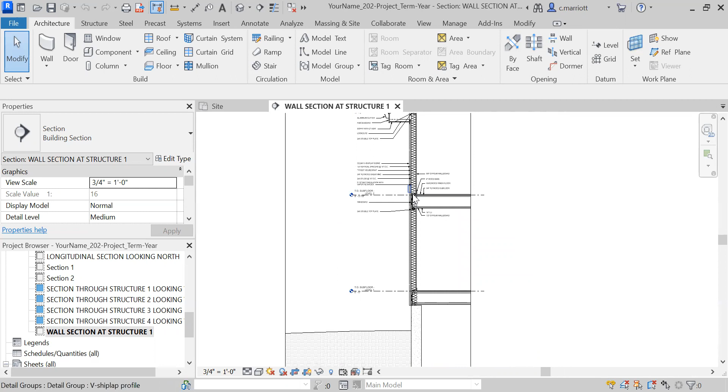In this video, we're going to continue working on the wall section. We have added some notes about the wall assembly and the floor above. At this point, we'll begin working on this floor and the foundation wall.

Before we do much more work to the foundation wall, we're going to make a change to this wall type. It's currently a 12-inch concrete wall. I'm going to click on edit type here, and we're going to add some things to this structure.

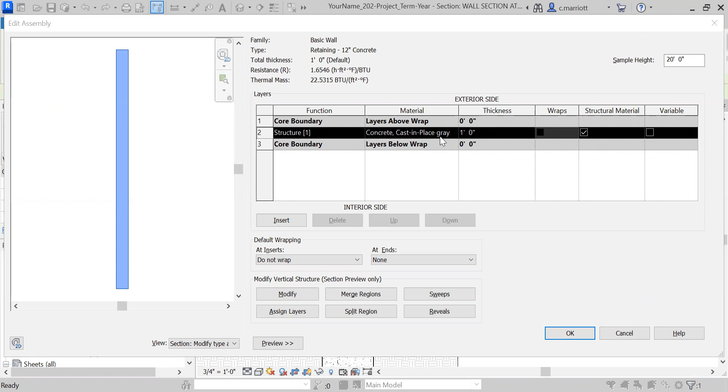At the moment, all there is in this wall assembly is a foot thick concrete wall. We're going to insert some more layers. I'm going to move this down and add 3 layers.

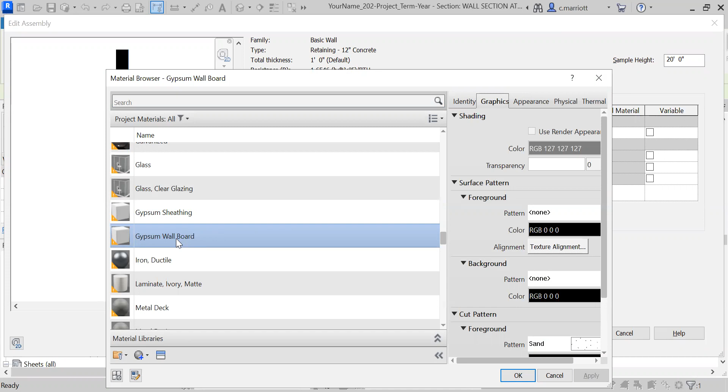The bottom one is going to be a finish layer. What we're adding is a 2x4 wall on the interior side of that foundation wall, and we'll be adding some insulation. So imagine this is a finished basement—that's the purpose of what we're doing here. Okay, wood, for this part.

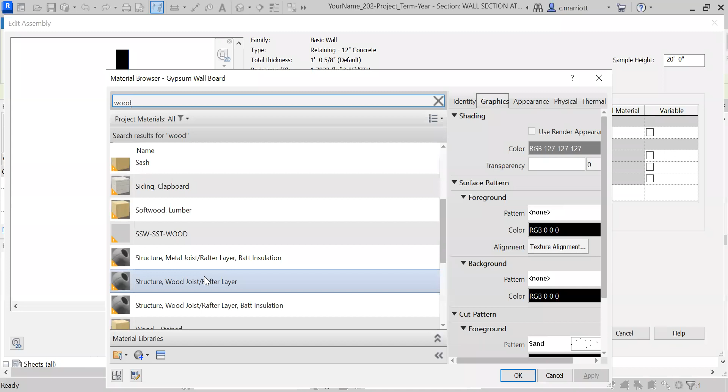Let me check and see what that should be called. I'm going to temporarily say okay here. Oops, we'll need to make some changes.

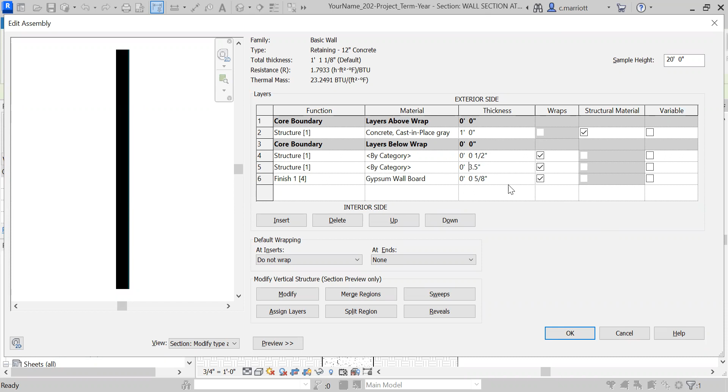So what we're going to have here is a 1/2 inch gap between the foundation wall and a stud wall layer. I'm going to change these thicknesses right now—3.5 inches, this will again be a 2x4. Let's see if it accepts that for the time being.

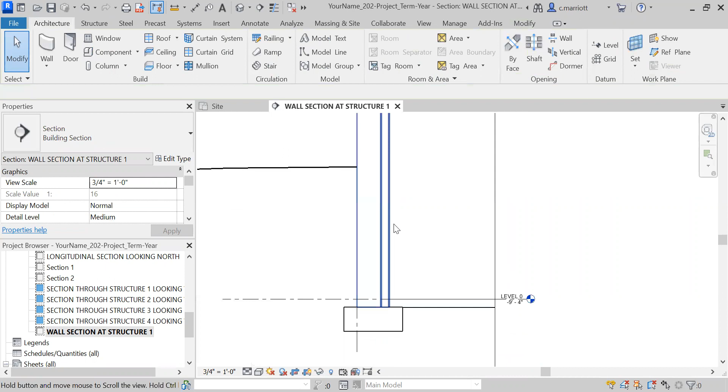Okay, so yes, now we have a layer of drywall. We have a space that we can put a 2x4 stud wall in, and then we have a little gap between it.

Now you can see that when I added this additional thickness to the wall, it sort of cut the slab back, and what we want to do is revise that so it comes back over to meet the foundation wall. So I am going to edit the boundary of that, and to do that I'll go to level 0.

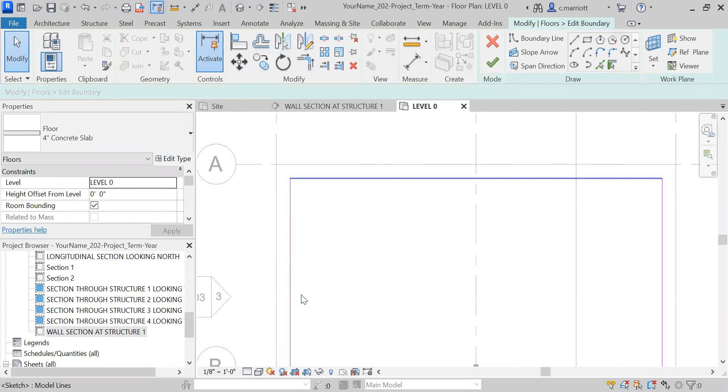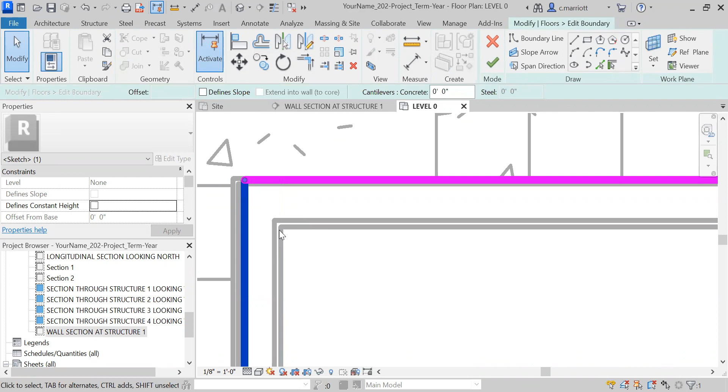Okay, I'm going to change my detail level to fine so I can see a little bit more information here. And I'm going to start to move my slab. I'm using the arrow keys to make these adjustments, and we'll take a look at it in the detail and see if it is where it needs to be.

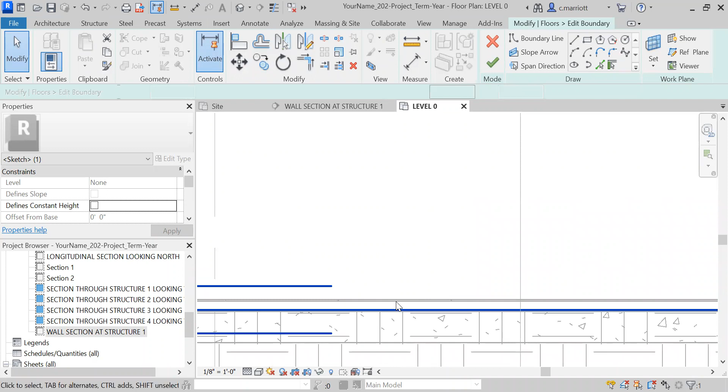Okay, I'm going to hit the check mark and let's go back to the wall section. All right, so I probably could use the alignment tool to get it a little bit closer to where it needs to be here. So let's try that one more time.

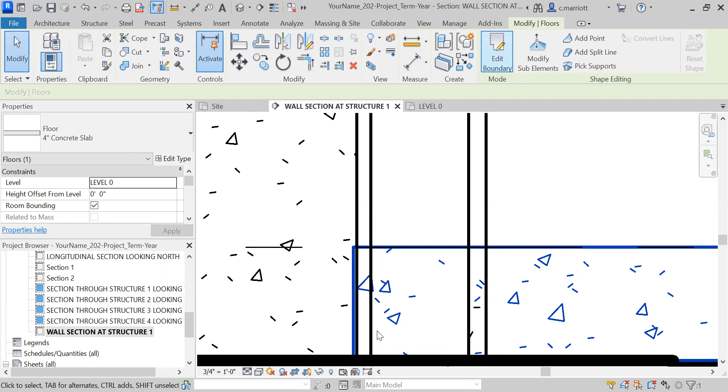Before I do that, this here is the south wall. So I want to pay particular attention to the relationship of the slab to the south wall. It's this one right here.

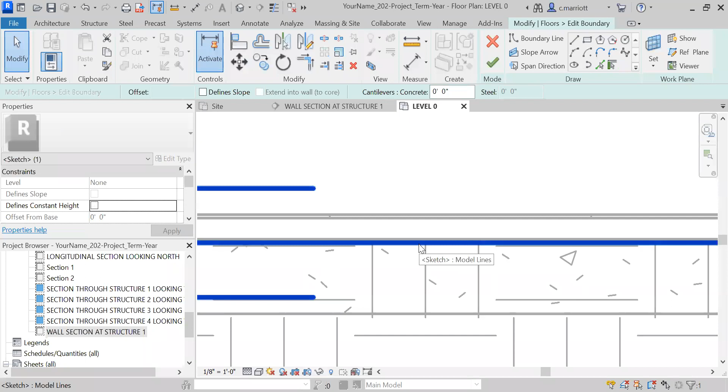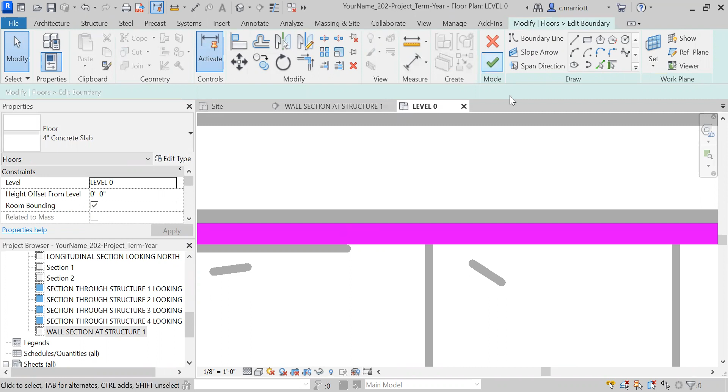See if I can click on it. I don't know that I can use the align tool in this case. Does not seem to be the case.

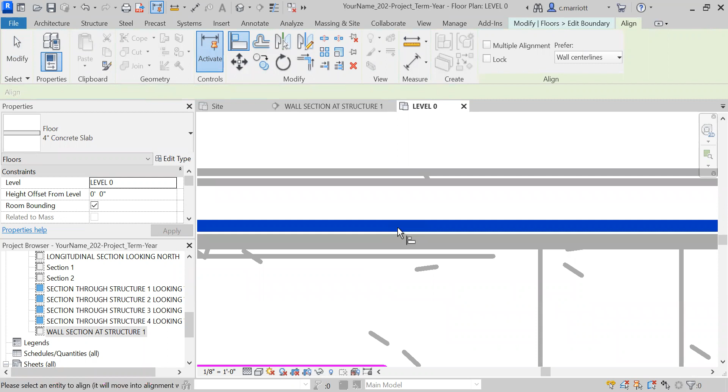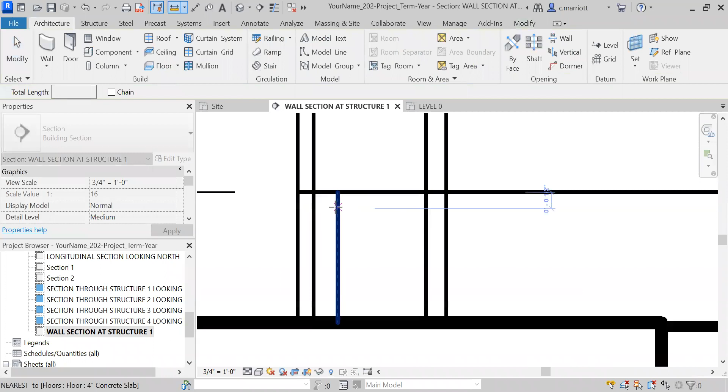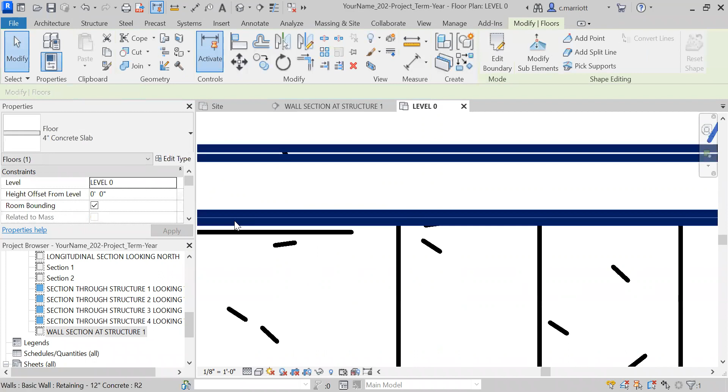I think what I'm going to do—I'm back in the wall section—is just measure this 1 1/4, and edit the boundary. Go back to level 0, and then I'm going to try to move it that specific dimension, and hit the check mark. Go back to the wall section, and I think we're in better shape now.

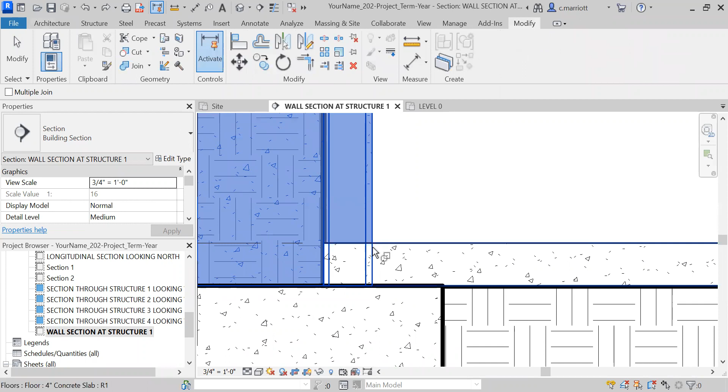All right, back in the wall section, I am going to click on one of these, and I'm going to go to modify, and I'm going to try to join the two. There we go. What we want is for this stud wall to sit on top of the slab. And for some reason, my foundation has shifted here.

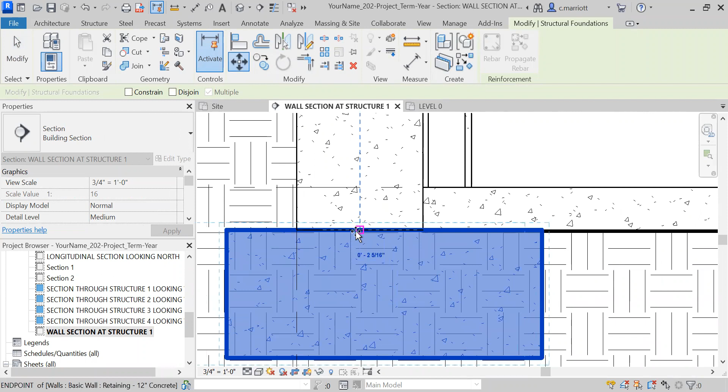We need to move that back so that it centers on the foundation wall. I think that may have shifted when I added the additional wall assembly here. So we're going to need to make that adjustment.

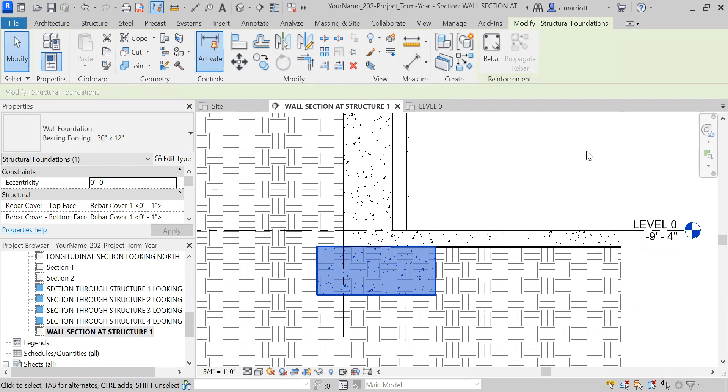So how do you reset it so it centers on the foundation wall? I've measured here the midpoint to the midpoint, 2 5/16 of an inch. And the setting that controls this is called eccentricity. So I've selected the footing, and I'm going to put in here 2 5/16 of an inch and apply that.

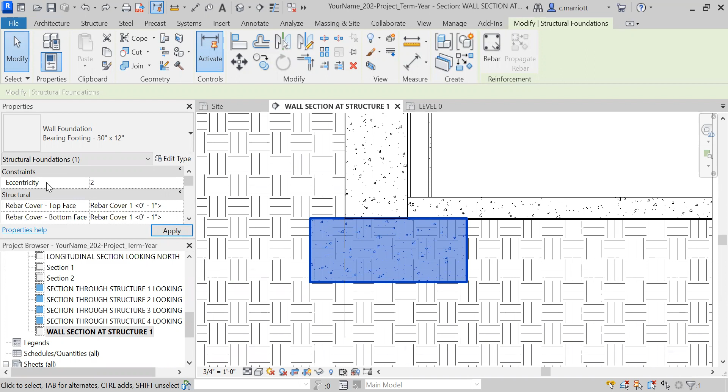Oops, what happened there? 2 5/16 and apply. There we go. So now you can see it's recentered itself on the wall.

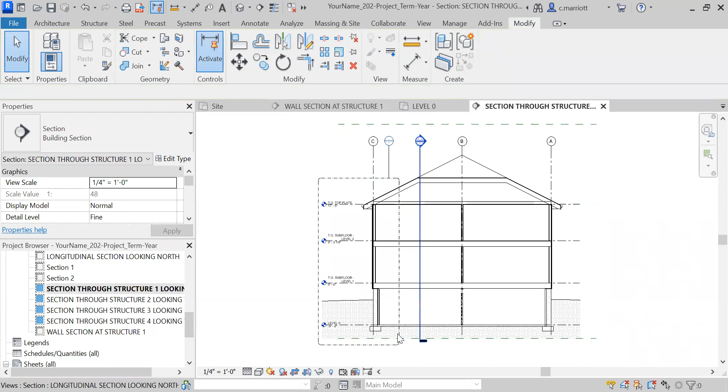Now, of course, this needs to be changed in all of the walls that are affected. So I'm going to go to section, this is section number 1. This one has been repaired, but this one probably still needs to be, and I'll have to go to the other section too. So 2 5/16 of an inch. And there we go, in section 1, or the longitudinal section, either one.

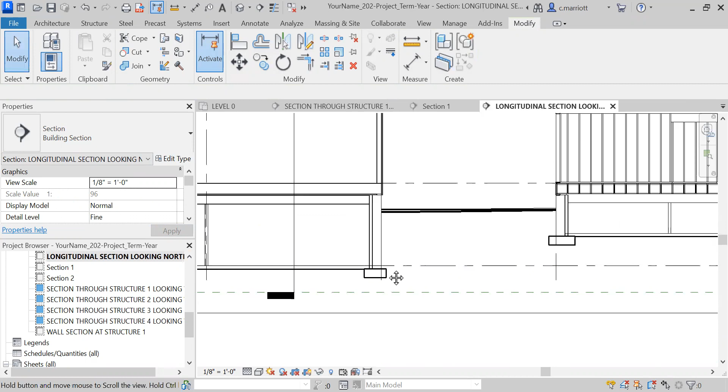I'm going to shift this over. So, I mean, there are instances where you may want to offset a footing below a foundation wall, and that is the reason for this particular setting.

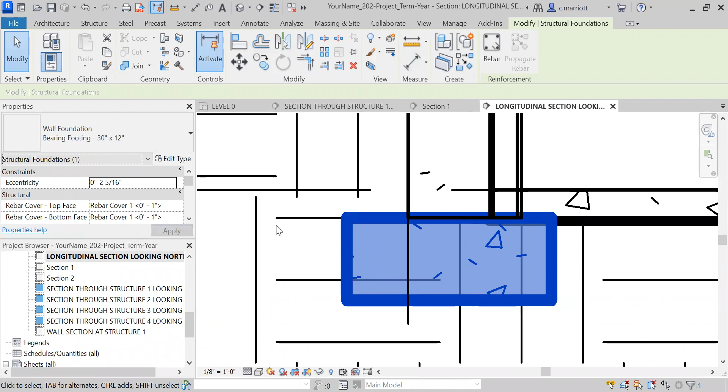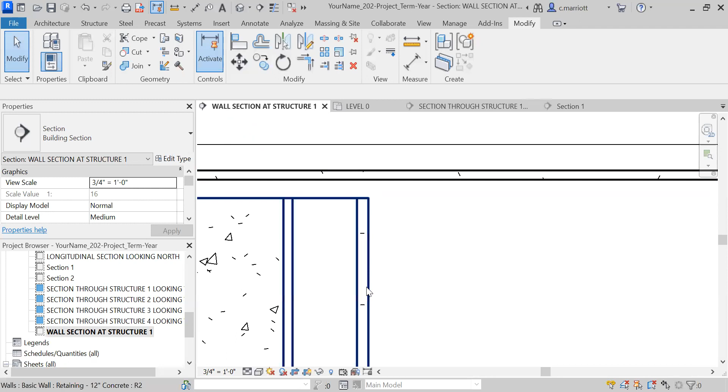Okay, going back to the wall section, everything is sort of coming together. We have a few revisions that we're going to need to make. This is the drywall of the floor above, or the gypsum wallboard of the floor above, and we wouldn't have this gap. What would happen is this would go up and join in here.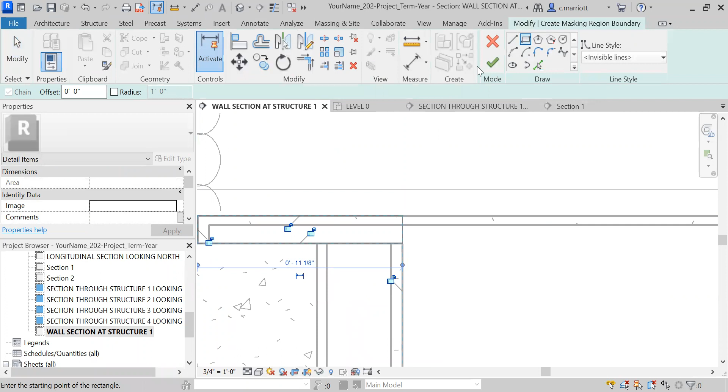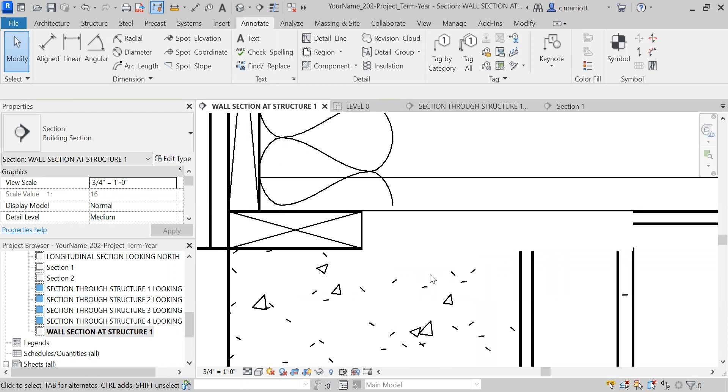So we're going to need to do some repairs graphically there. To begin this, I am going to go to the annotate ribbon, and create a masking region, and draw a rectangle that covers some of that. I've got invisible lines here, and now I'll need to replace some of the things that I've erased, but this is a starting point for this work. I'm going to pull this masking region down just a little bit. Now I will have to replace some of the line work that's in here, but that's okay.

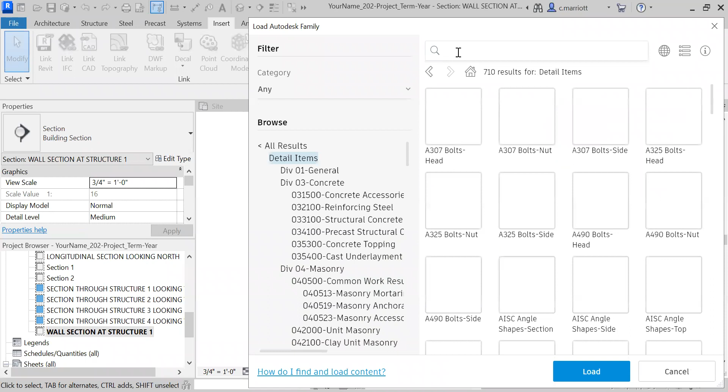I need a 2x4, and the way to bring that in, as you have done in the past, is to go to Load Autodesk Family, and we're going to type in lumber, nominal cut lumber section is what I want to load. And this is going to be our standard 2x4.

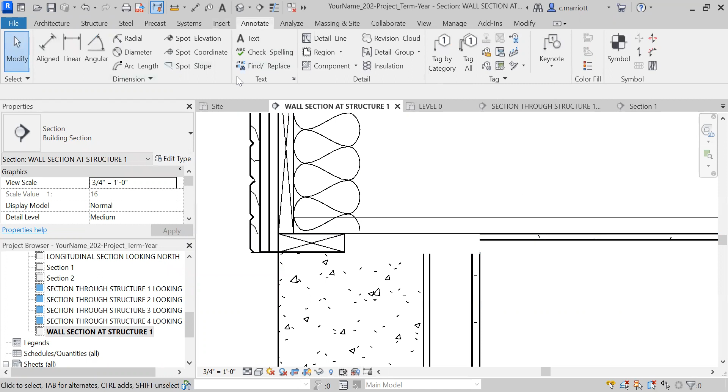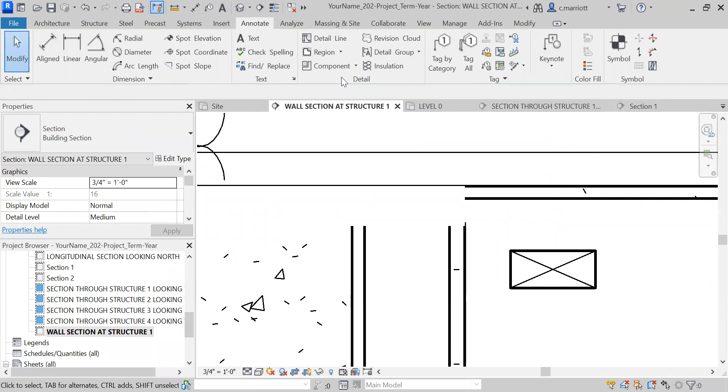Okay, so now when I go to annotate and bring in a component, I can look for a 2x4. There it is. Click here. I'm going to click on this, and rotate this member, and move it into place. So it's going to go right here. Should align with my drywall, or my gypsum wallboard.

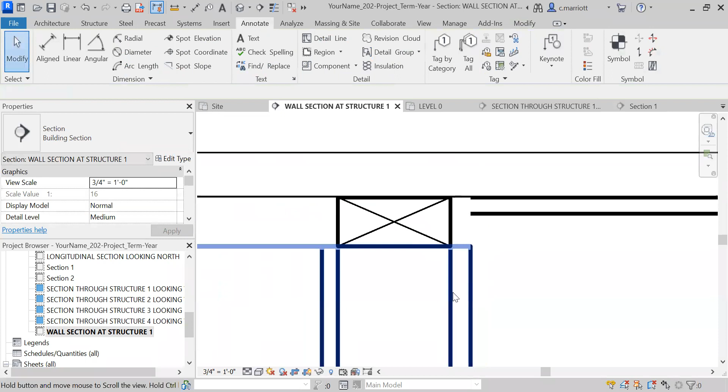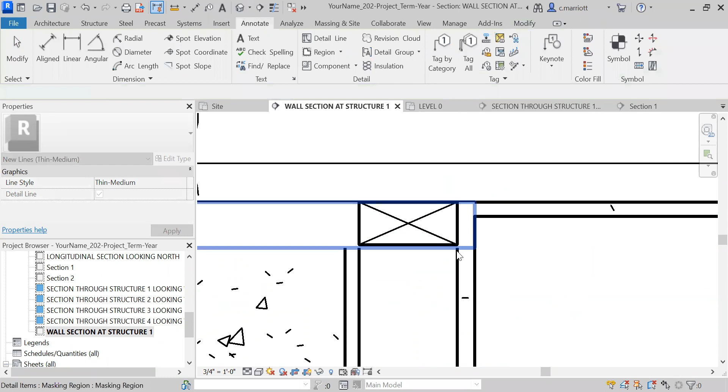So I'll have to add a few extra lines in here to kind of complete the picture. Going to annotate, detail line. I will use my thin medium line weight, and connect some of these lines so they're graphically making sense.

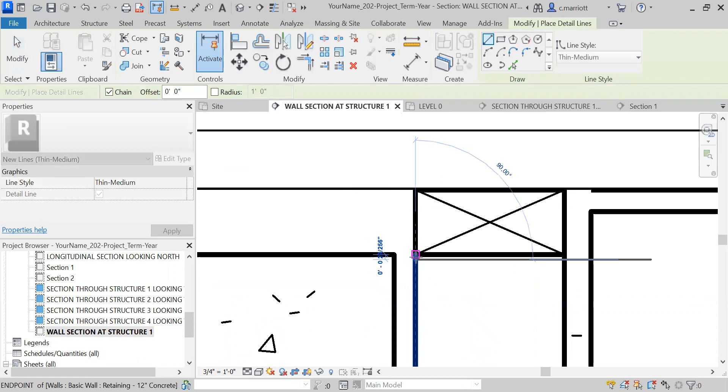The foundation wall should come over here. This is, as I mentioned, a gap that we're going to have. You wouldn't want to put the stud wall directly on the foundation. And I'm going to need to make a copy of that 2x4 down at the bottom of the wall.

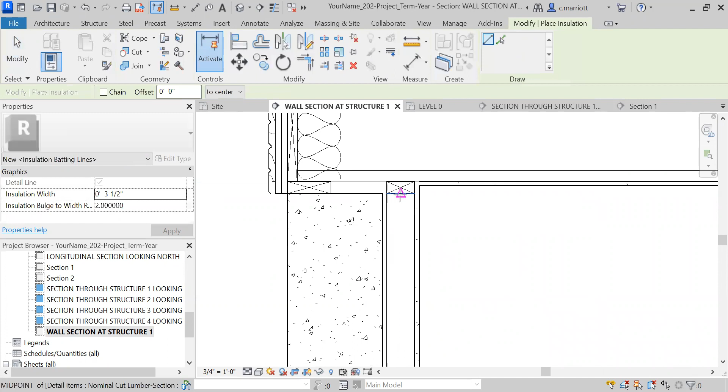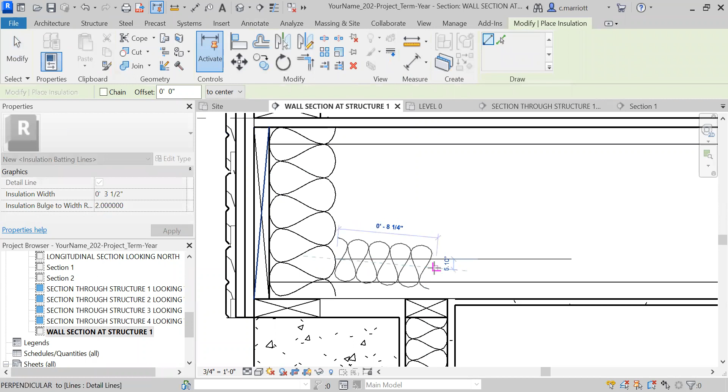One of the reasons that I'm adding this wall is so that I can get some extra insulation. So I'll go ahead and add this, and this is the default thickness, so I don't need to make any thickness changes to it. We have a little bit of a gap here where there's no insulation, so I can add a small piece of insulation horizontally, so it just kind of gets stuffed into the space. Again, the idea is just to make sure we have a continuous insulation barrier. So I'll just move this down a little bit.

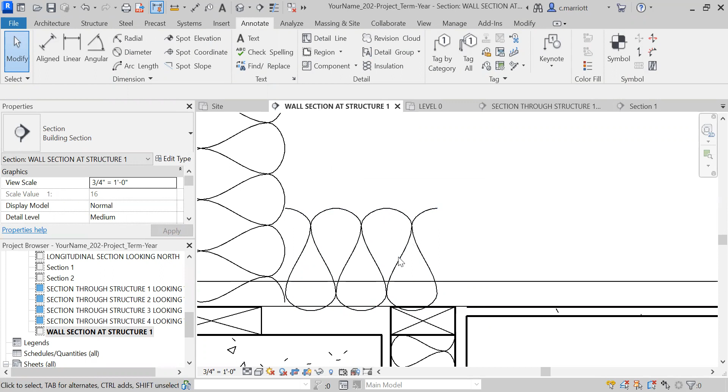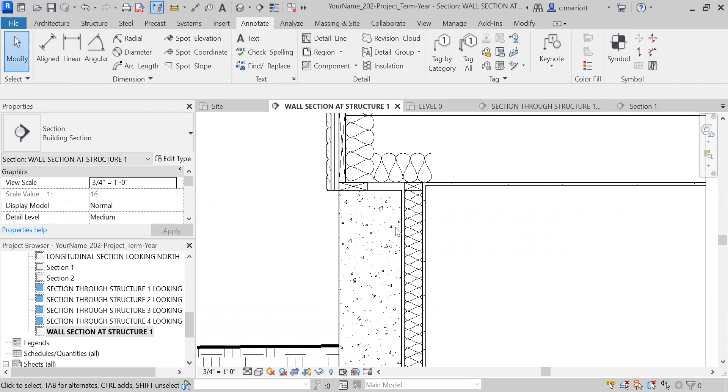Extend it out a little bit longer. Okay, and we're about ready to begin adding some more text annotations. So when we added the siding, we connected it to the wall assembly above.

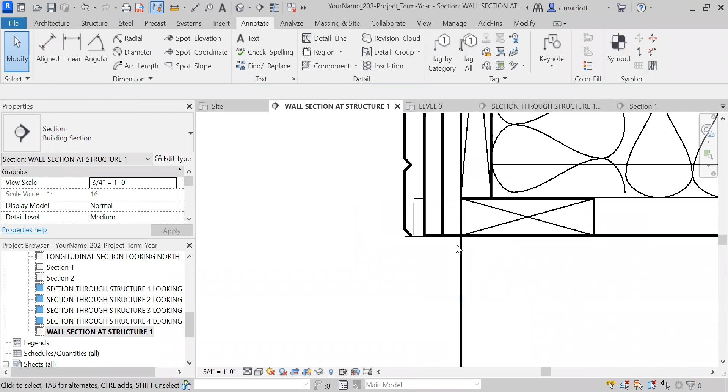And what's happening here is we have this sill plate, and the sheathing is sort of terminating directly at that intersection of sill plate to foundation wall. It really would be best to pull these layers down below the top of the foundation wall. So I'm going to use some masking regions and some line work to extend that and complete the detail a little bit.

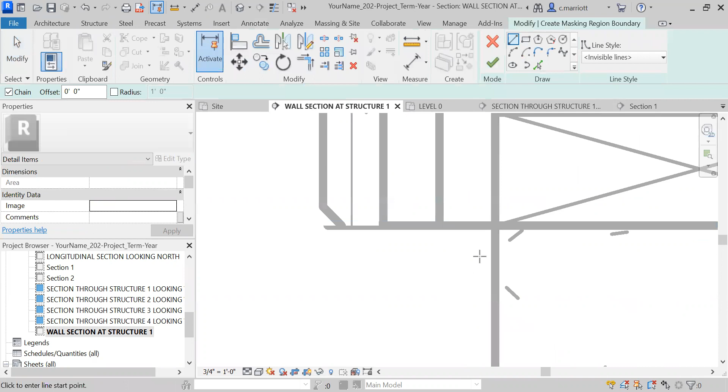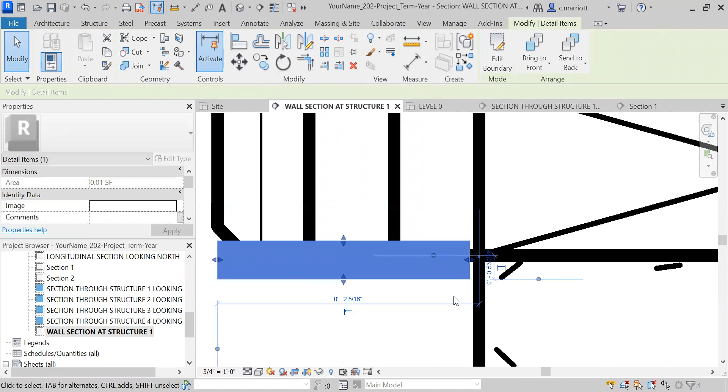So the first thing I'm going to do is go to region, masking region, and I am going to cover, I'll use a rectangle, and cover this base condition here, hit the check mark. Now I might need to stretch this down a little bit, but for the moment, we're going to use this to conceal the existing line so that we can work with it a little bit more.

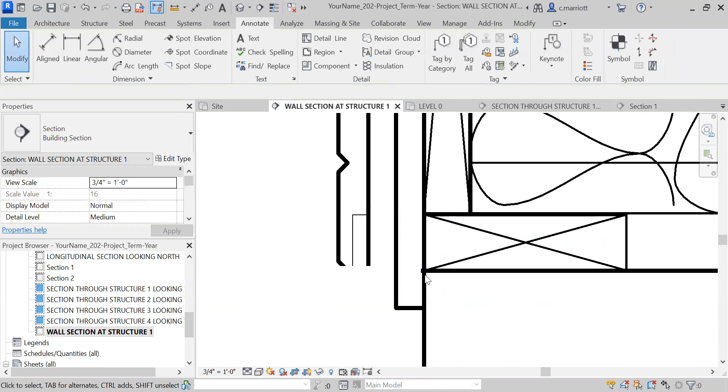For the sheathing, I'm going to bring it down an extra inch and then pull it over this line. I'll extend it so I don't have that gap anymore. So I'm really just kind of completing this detail a little bit.

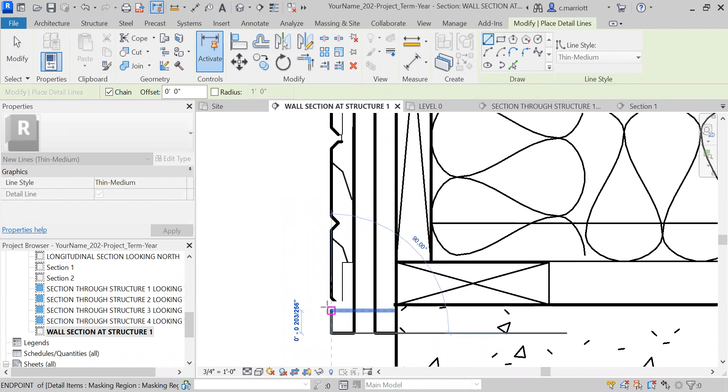Also, the siding profile has this little extension down here and there's nothing behind it. It probably would be better to develop some kind of trim detail at the bottom to give a little more backing to that. So I'll use some detail lines to complete this, and the idea is to bring it down to the same level here. Again, just to complete this detail a little bit. It's so small that it won't read very much in the detail.

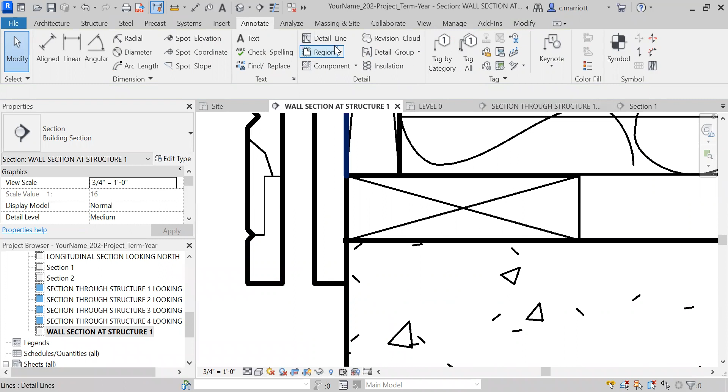So we'll also have an insect screen that happens at the bottom of this, and I'll use my thin line for that so it doesn't compete with the other lines. Okay, so at least we have a little bit more closure to that joint between the foundation wall and the sill plate.